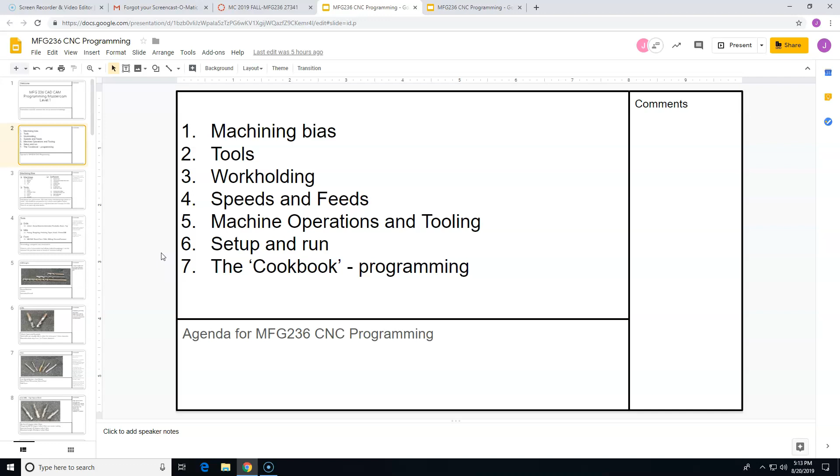All right, so my machining bias is, as you read down through these, some of them are going to go, ooh, and some, that's a terrible machine. I was always taught that anybody can make good parts on a new machine. Machinists can make parts on any machine. If it is able to run and hold a reasonable amount of tolerances and repeat, it doesn't matter how poorly the machine has been maintained. That should be your first job, is to bring it up to speed. But at the end of the day, you should be able to make parts on any machine.

So same with the tooling. Some of these you're going to go through and say, I don't like those tools, I've used those on this. Well, in that application, yeah, they were probably terrible. Grade of carbide, coatings, tolerances on the tools, just a matter of how they ground the relief for that material is terrible. But that doesn't mean that the next job is going to be the same.

So more so, I would see that bias in software. Like we were saying earlier, Mastercam, CamWorks, which is also SolidWorks Cam, SolidCam, pluses and minuses to everything, HSM and Cam for Fusion 360, SurfCam, FeatureCam, and if anybody's ever seen BobCAD-CAM at WESTEC or any of the trade shows, it has actually gotten pretty good, but they have such a reputation, such a bias to them now of the way that they presented themselves in industry and the way that it's kind of marketed, that there are companies that are using BobCAD, but not as many as could be. And then same with SolidWorks, CATIA, Inventor Fusion 360, Pro E. Always look back on the Pro E guy that said, 'Oh, SolidWorks will never amount to nothing.' I was like, yeah, in 2 or 3 years, SolidWorks is eating your lunch. So the next best thing is right around the corner.

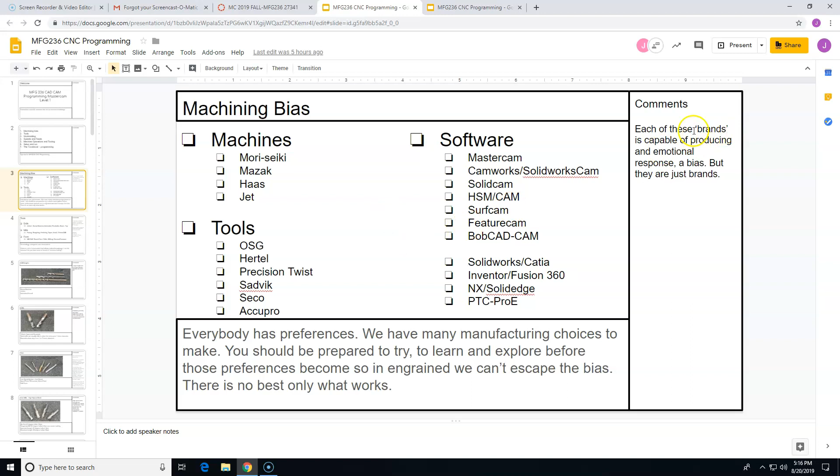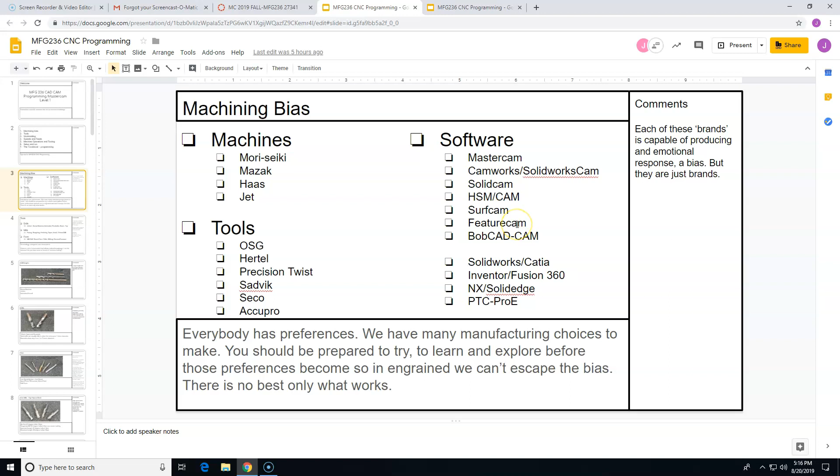All right, and then each of these brands, an emotional response - they're just brands. And like I said, the softwares on the modeling side, the 3D modeling side, they're reaching convergence. They're more the same than they are different. The way that you get there, the way you go through the maze, is a little bit different, but the end result is very, very much the same.

For the tooling, we're going to just talk in general terms about the drills - jobber, screw machine, extended parabolic, reamers, taps. I did not get the pictures of the reamer. I need to find the big honking, like 3-inch reamer. Facing, roughing, finishing, tapers, insert and thread mills, form tools.

Consider the mill drill, roundovers, T-slots, slitting, convex, concaves. Anything that is not your standard end mill kind of goes into that form tool. If I would have to draw it to get its profile to recognize geometry in the CAM program, it's a form tool. So categories and descriptions, a lot of information, again, with that cultural knowledge.

And a lot of these tools, when we talk about lengths of cut, diameters, reliefs, neck downs, specific geometry of that tool, we're opening up MSC Direct, your favorite tool supplier, and searching for that tool and looking for its specifications.

And then we'll know that a half-inch 3-flute or 4-flute carbide from AccuPro might be 1 inch, but from Hertel it's 1 1/4 inches. Generally accepted, it's 1 1/4 inches. I've run enough of them that I'll think it's 1 1/4 inches until I pick one up and actually measure it at 1 inch. But there are variations in tool lengths, and you're always going to need to verify it in the setup.

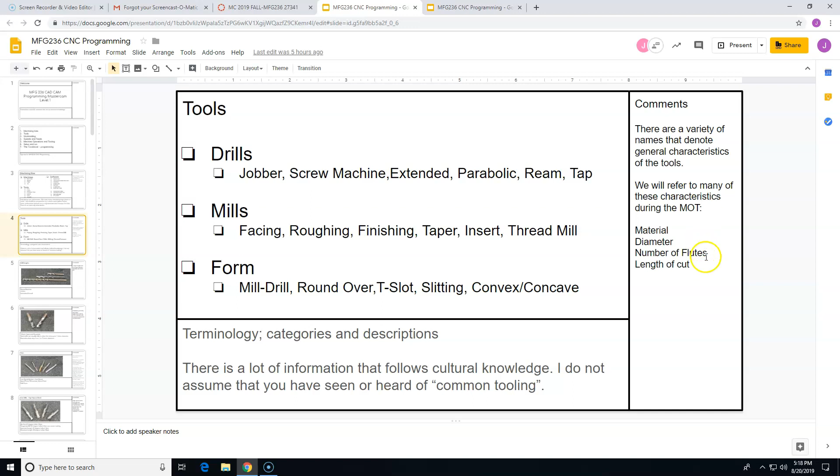A lot of these we'll take care of in the MOT, and we're looking specifically at the characteristics: the material, high-speed steel, carbide, coatings, number of flutes, diameter. We were just talking about length of cut.

So on the drill lengths, starting at the top, the screw machine length, longer lengths, less rigid. You're going to have more chatter, less engagement that you can take. Jobber length, and then the extended all the way up to probably whatever length you want to deal with.

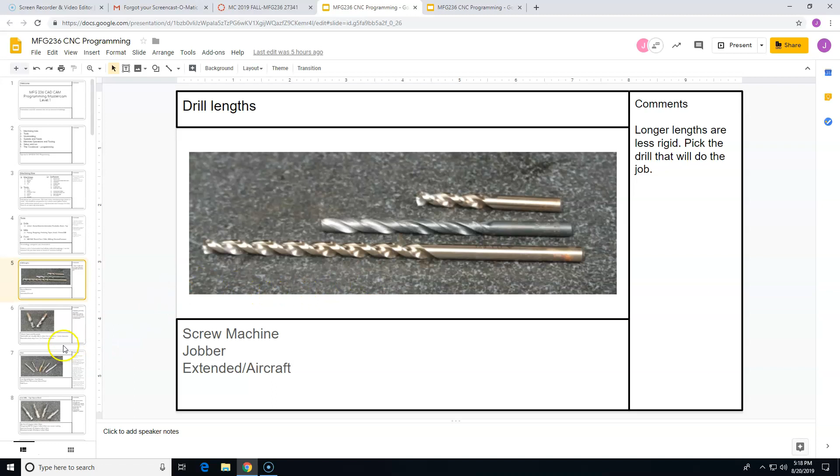Let's see if we can get through the tools, and we'll save the work holding for next time. The two drills: on the left is the twist, on the right is parabolic. I need to get a little better picture with those side by side. This has a little bit more angle in the helix and slightly different tip geometry.

So where the standard twist drill is going to be about 1 times D at its max, the parabolic, depending on the manufacturer, is going to say 1 to 7 times the diameter of the tool for the pecks. So I can start off heavy, and this will eject the chip, where the other one will kind of weld up and clog the flutes, whatever that geometry.

So in a production environment, where I'm watching this one on a 40-second cycle time, I'm probably going to shove this drill in there in about 10 or 15 seconds. If I'm looking for seconds, because that machine is only ever going to run that one part, and seconds over the course of years become days, if not months, we're going to look for every second we can get.

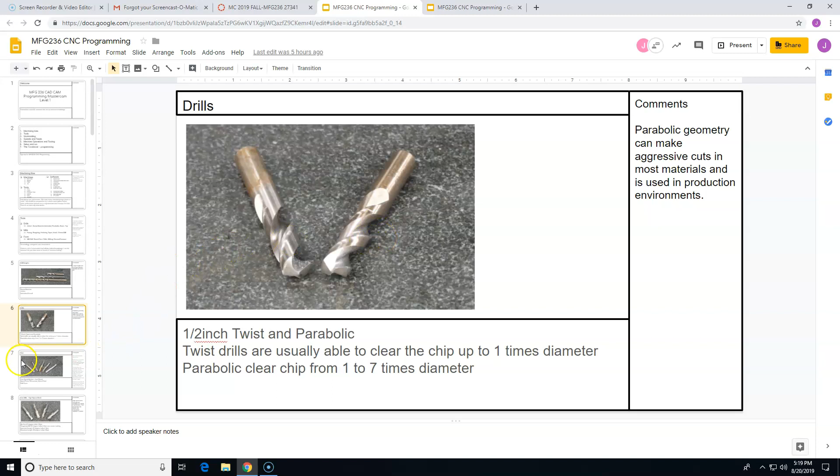On the taps: the fast spiral bottom, fast spiral standard end, tin-coated spiral point, bright finish or standard spiral point, and then the roll form taps.

A couple of comments: the fast spiral taps, the chip is going to go up, but they can still catch and they can still break. Of course, the difference between the spiral point tap—we had a 10-32 that we ran 100, 120 parts on before it broke. The fast spiral was closer to 250. And then we come over to the thread form, which has now run about 1,000 parts, or close to 4,000 holes, and it's still going.

But the issues become the resistance at the cutting edge. The roll form tap displaces the material, so technically it's a stronger thread because it's not shearing the material. But because the tap drill has a larger minor diameter and it displaces into that material, you can't gauge it the same way that you can a spiral point.

So aerospace, a lot of mil-spec won't allow thread forms. It's just not inspectable.

And then with the spiral points, we're always going to talk about pack up. As the chip pushes ahead of the tap on a blind hole, we get to a certain point where that chip cannot compress anymore, and then it's going to break the tap. It's the same as just hitting the bottom of the hole—there's no place left for it to go. So we're always leaving that little bit of room, and then accounting for having to clean that out.

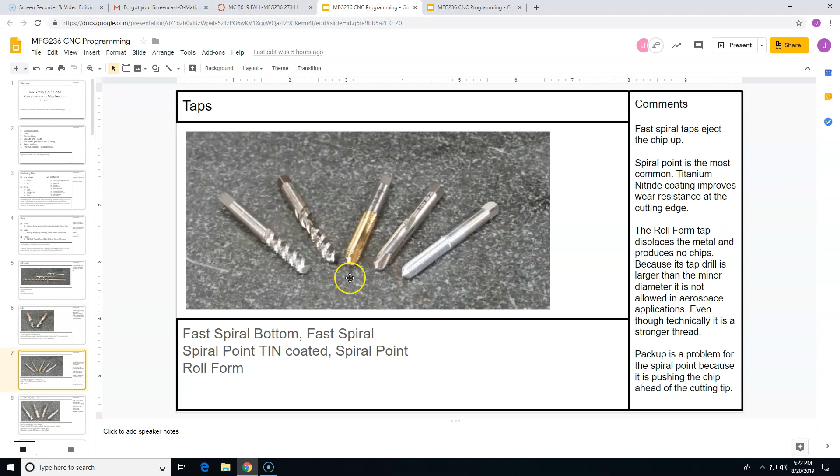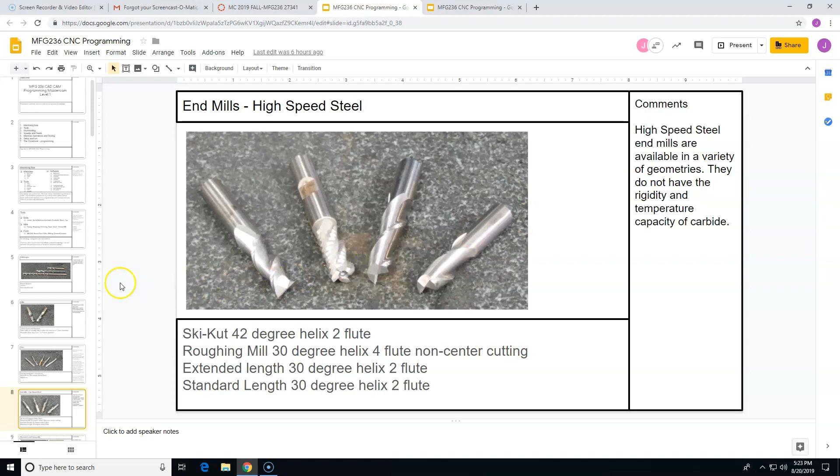Then we'll come over to the fly cutting and the facing. Single point with a lathe bit, single point with an insert. This one's called a B52. We've had really good luck, leaves a beautiful finish. We get these in different sizes, I think I have the 3, the 5, and the 7. Can get that nice rainbow mirror finish out of a piece of aluminum.

For the most part, we run a lot of aluminum, so that's kind of our first. We'll talk about the steels and the harder materials as we go. So let's see, consistent cut balance.

And then the insert cutting for the face mill. I think this one is either a 4 or 4.5, so it's a pretty heavy tool. You get into that heavy of a tool, then you start having to take into consideration, especially for the side mounts, as fast as those side mounts whip around now, that'll actually throw that, an 8 or 10 pound tool.

I think we measured that one at like 10.5 pounds. It'll throw it out of the arc. Umbrellas, then get that size, we're worried about hitting the tool next to it. So still have some considerations on tool selection, how it's going to fit in the machine.

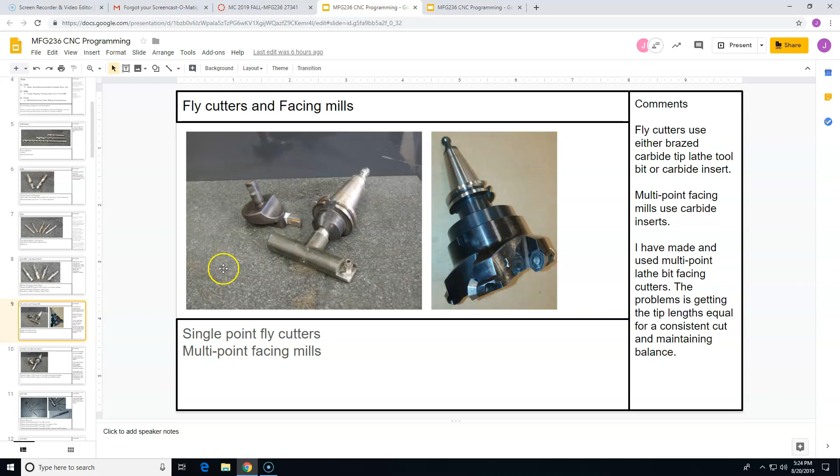And then the Weldon Ski Carb, which they don't... they make them, but instead of a $300 tool, it's now a $600 tool. This Ski Carb is coming up on either 15, 20 years old, probably old enough to drink. But it has a lot of wear on it, and it's one of those tools, the duller it gets, the nicer the finish it leaves.

And the OSG 3-flute TiN coated, again, rigidity, having the shorter flute lengths, we're going to be able to push that tool a little bit harder and make those adjustments. And then the other difference between the fixed holder - the set screw coming in from the side is basically side loading the tool. That little bit of clearance, millionths, tenths difference between the shank of the end mill and the clearance on that fixed holder, we're side loading it.

We're not perfectly concentric. We're going to inject a little bit of run out in that tool. The ERs are going to technically have perfect run out, a couple tenths at most. But under an aggressive cut, we've had tools pull out of the ER collets.

We're running all-TiN coated half-inch roughing tools in 4130. It was 4130 anyway, 4340 now. Preheat treated, about 40 to 45 Rockwell.

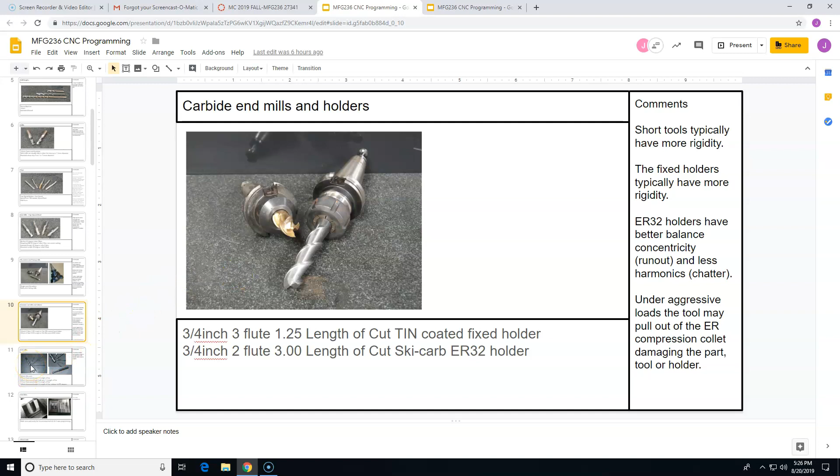And then we have the tool set. Again, the 3/4 inch Ski Carb extended length, so we have kind of a truncated flute length, so we can keep the rigidity up. It's still going to chatter because it's a long tool. I need to find the chart because there was a comparison that a company did for different lengths, and it was kind of surprising how much variation they had in lengths, just where it landed in the harmonics.

So ball end mill, also truncated, 3/8 inch ball end mill, a little bit shorter, 1/8 inch, a little bit shorter, and then we come over to the lollipop cutter, or 270 degrees of cut.

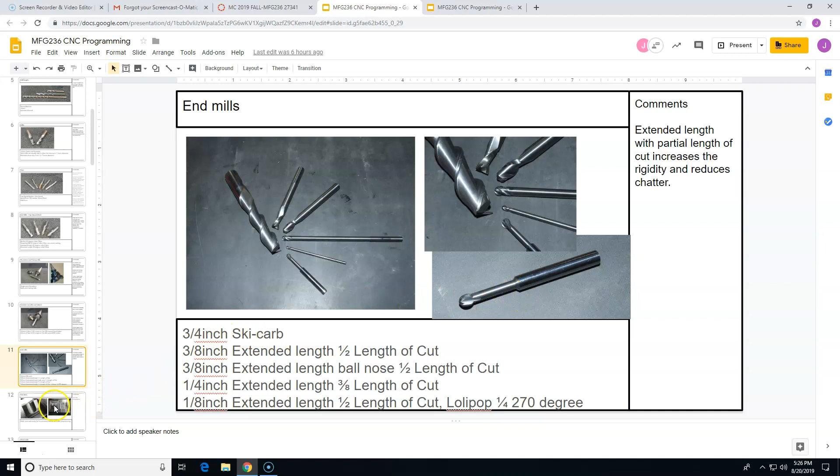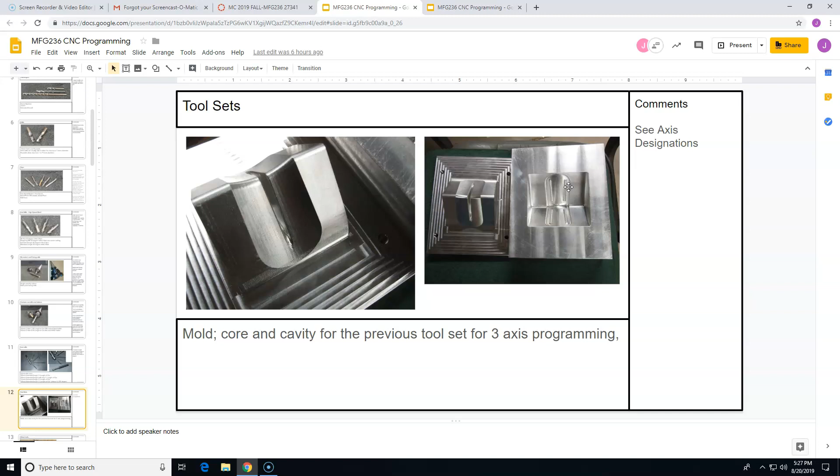Some wood tools. Keep in mind that Mastercam also programs for routers. So I will bring in the other slideshow of my 2 years at Thornwood Furniture Manufacturing, where we ran a lot of these tools.

The brad points, strange looking tools, single flute spiral. Single flute, I need to get a close up of that one because it's really cool. Single flute tools, down shear, up shear, down shear, and then in comparison, standard up shear end mill. You may have only ever seen what we would consider the standard end mill. The down shear is weird because in conventional style cutting, its tool pressure is still pushing down on the part.

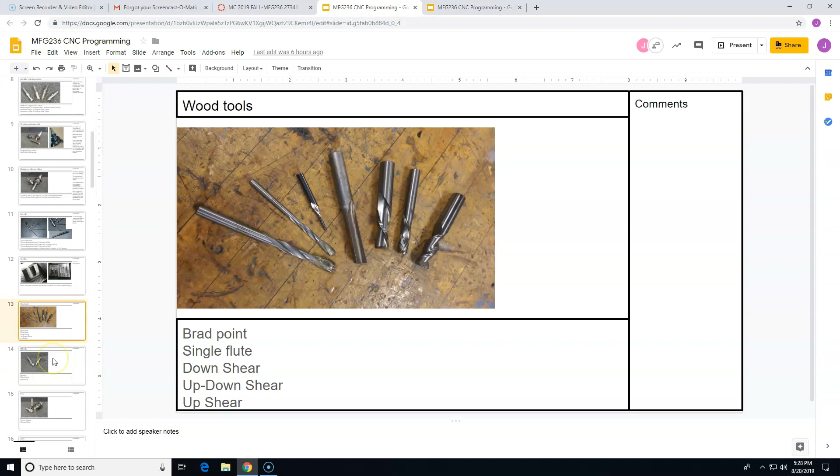Go figure, it works in wood. I haven't ever touched one in metal. All right, the mill drills, again need a little better picture, but basically an end mill with a 90-degree point. Great for chamfering, spotting, and a little bit of engraving.

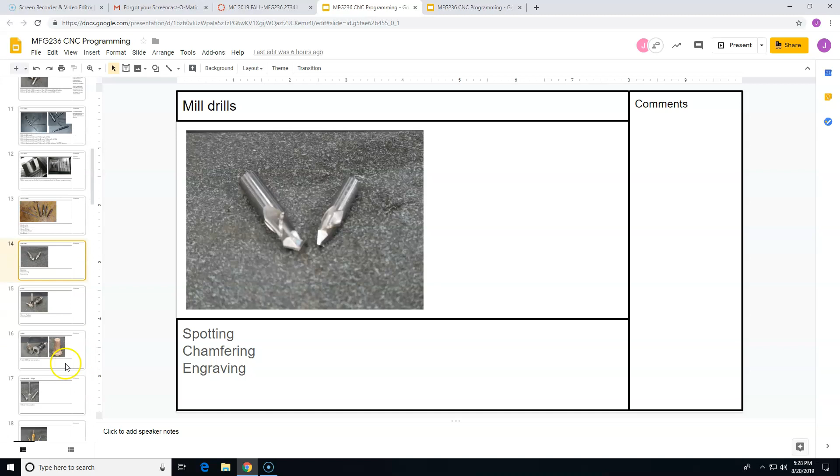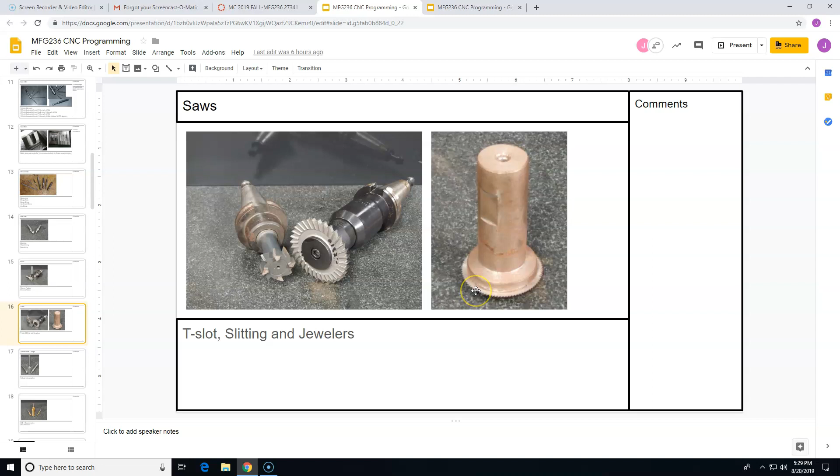The saws, we have the T-slot cutters, slitting, and jeweler's saw. So when you don't have an arbor for a jeweler's saw, you chuck one up in the lathe and you make one. Basically just mild steel and enough to go through, and we're making little grippers for the robots, and it needed about a dozen of those, I think about 20 thousandths, so half millimeter slots on the face of the gripper. And then thread milling, we can do helical interpolation.

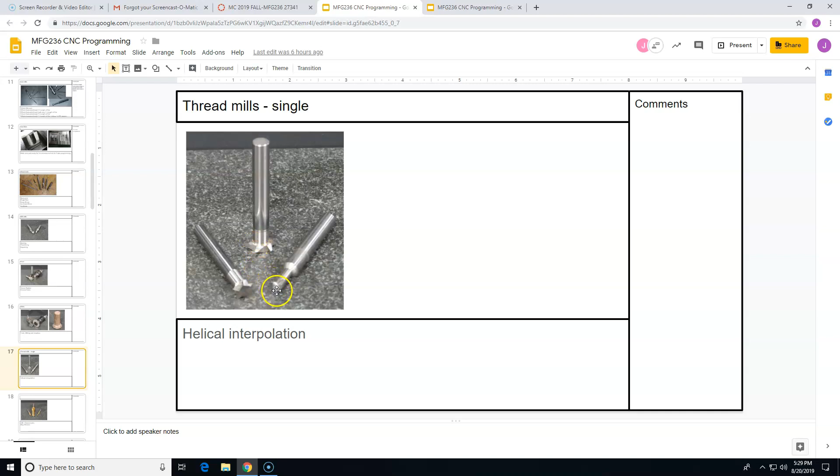I will go steal a picture of the multi-tip thread mills. Advantage of the multi is that in a couple passes you get the same result as making a bunch of passes in the single point. Advantage of the single point is it's not pitch dependent. So I can do just about any, as long as I can get to the root of the thread, we're going to be able to make that thread.

Multi-step reamer, these were probably for the wood as well. The clearance for number 10 with the countersink grounded into the end of it. So as long as we had the clearance, not drilling into the bed or into the vacuum pods, we could go through and drill and countersink in one shot.

And then our drill chucks, so the keyless, I prefer the key to the keyless in the higher RPM spindles. By the micro, and then the keyless. Problem with the keyed is I've had it on drill bits actually loosen up as the regenerative braking kind of untorqued itself, and all of a sudden, there goes the drill bit.

On the other hand, I don't want to take a $300 Albrecht on a $120 Cat 40 and have to wrench on it with the spanner wrench every time. So the keyless, at least if we tighten on 2 of the 3, I haven't ever had a keyless back out on the regenerative braking. The 1 or 2 times the power went out and we were running at 10,000 RPM, 20 minutes later the spindle was still winding down to a stop. That regenerative braking is doing quite a bit.

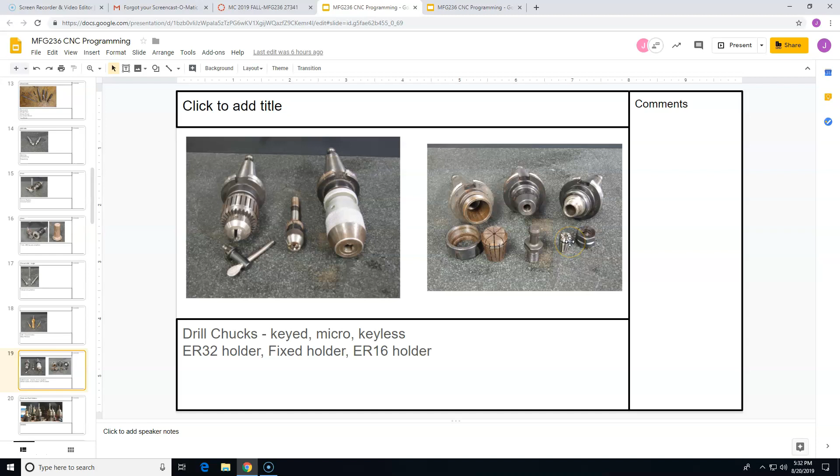And then the ER16 is about 1/32nd, all the way up to 10 millimeter, 3/8 to 10 millimeter.

All right, so the point of the tools, and like I said, we'll get into work holding next time. Point of the tools is there's a lot of money sitting there. You go out to buy a machine, you price a VF2 at $50,000-$60,000, and then you put 2 or 3 vices on it so that you can cover multiple production operations. Each one of the tool holders is $100 to $150.

Each drill chuck $120 to $150. All of a sudden, you're looking at $4,000 to $5,000 of tooling. Oh, and we haven't even put the tools in it yet.

Then I said 2 or 3, probably at least $2,400, $2,500 in vices. All of a sudden, your $60,000 machine is $70,000, and you still haven't bought the computer to run the software. The CAM packages still hover around $5,000. And before you know it, you're at $100,000. So companies are making big investments, right?

So it's to your advantage to be that meticulous, OCD. I joke about my OCD, but I'm completely OCD. When something breaks, when it doesn't do exactly what I expect it to do, I'm in analysis mode. I want to know why. I don't want it to ever do it again. Even though I know it's going to do it again, I got to get over it.

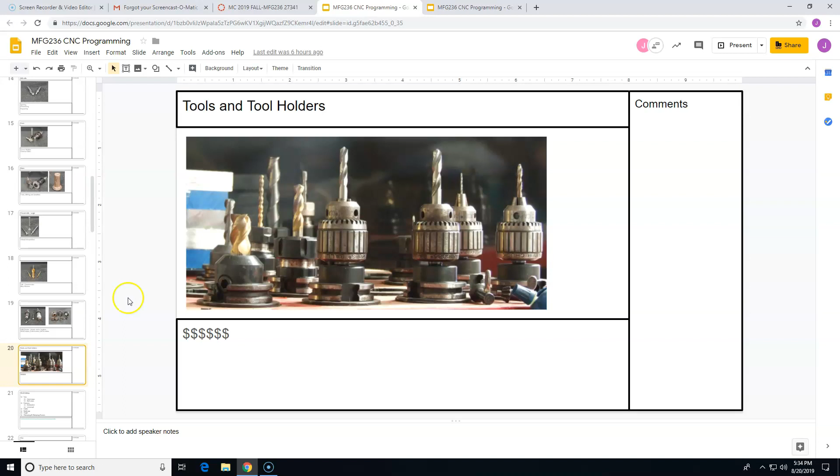Is this slide on Canvas? Yeah, this is in Canvas, and it is introduction slides. Yeah, it doesn't give us permission, you have to request it. Okay, so it's on my Mesa account. If you've requested permission, I will do that as soon as we get a break here. I had to share the Mastercam over from my Mesa account over to my Maricopa account, and why they're in separate domains, I don't know. I got to get you in the same domain, and then you'll be able to launch it. So I apologize for that, I didn't realize it wasn't loading.

Would you recommend downloading that software, even though you can't generate code for it? Could you do the program in there and then generate the code here? We will have to verify that against the software that's installed, but it will read... in past versions, our education license was able to read the MCX file and produce code with it.

If we stay at 19, we're not going to be able to take... well, sorry, if we stay at 18, we're not going to be able to download 19 and migrate. My 18 expired, so my demo HLE ran out on July 31st. I'm pretty sure what Mastercam does is from August 1st to July 31st, that's your window to do 2019. If 2020 comes out, it'll be this plus, and then over to July 31st of 2021. So you got a little bit of overlap there to where you're not constantly loading software, but we need to kind of verify some of those.